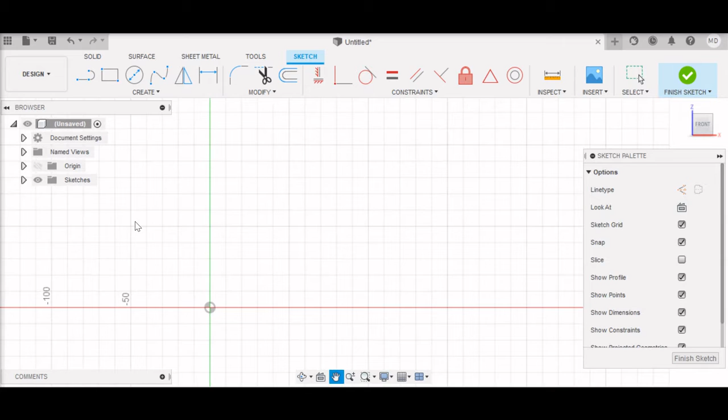Okay, we are going to design using Fusion 360 an electronics enclosure in a minimalistic style. We start by creating a sketch, then we go with a rectangle, we choose the extrude, and we set up 3 millimeters.

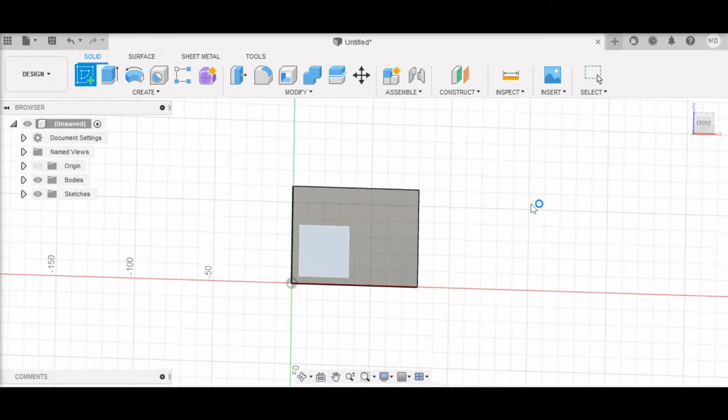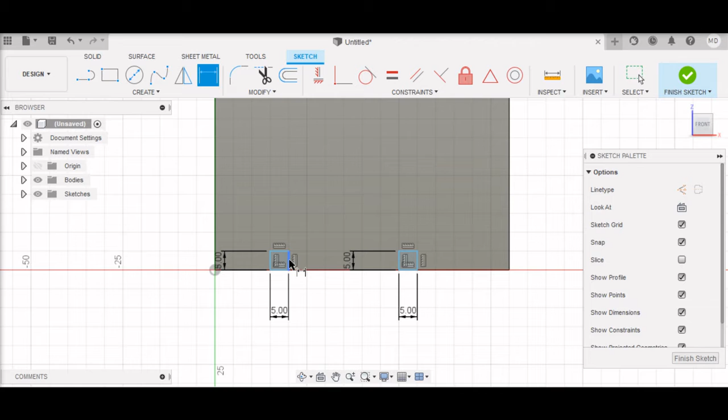At this point, we're going to create a different sketch, and we are going to put there the elements for an extrusion over this first layer. So we go with a 5x5 rectangle, another one. Then we check the measures with the electronics project and we put 31 millimeters in the middle.

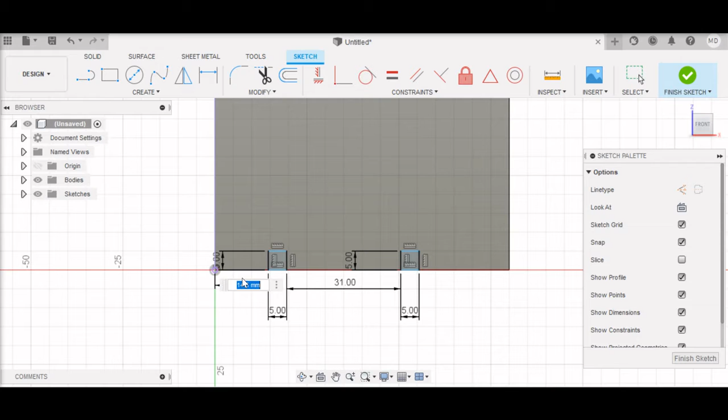Then we use the dimension tool to check the size over one side of the enclosure and the other one, and we make the adjustments so this is centrally aligned.

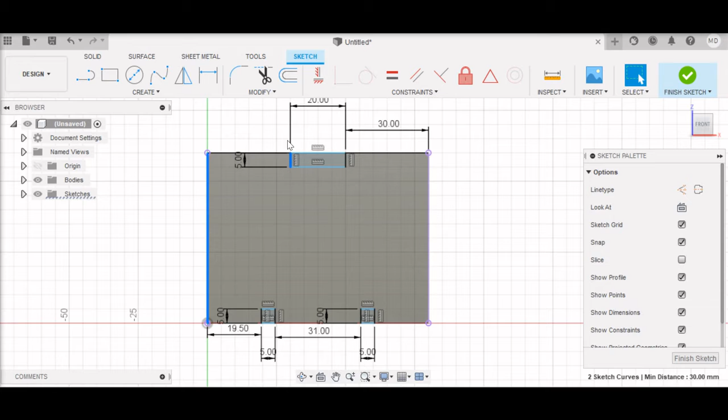The next step is to create another support at the back. This support is going to have 2 holes for screws, and we're going to put there a gesture device. Again, we check the distance to one side and the other one, and let's see, the other one is 30, so nothing to do here, everything is perfect.

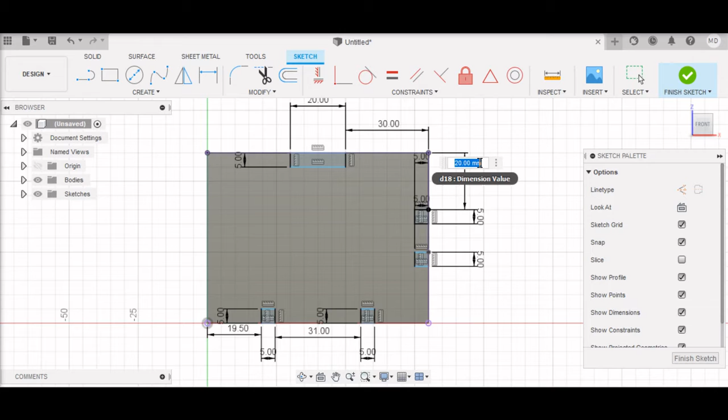And over the right side of this enclosure, we're going to add 2 little columns to hold a buzzer. Again, we do the same with the dimension tool to check the distance to the side. It's 20 millimeters to the other side. Let's check again, and we have 20 millimeters, so everything is perfect.

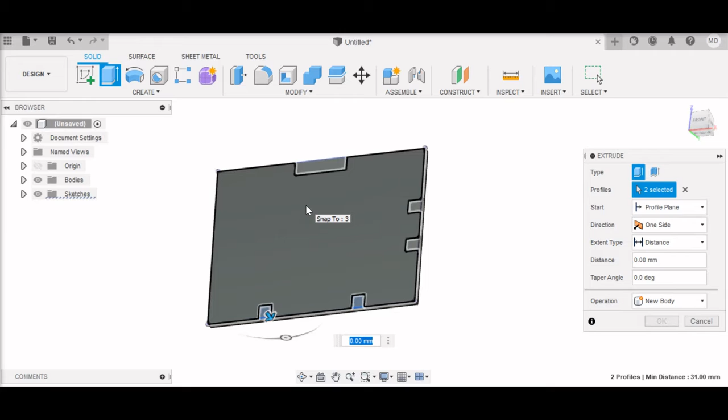Then we select extrude, we select all the shapes recently created. First one, these 2, because they're going to have a different size. To the other side, okay, so minus 25 millimeters. We select the sketch. These are for the buzzers. Will be a little less higher, 10 millimeters.

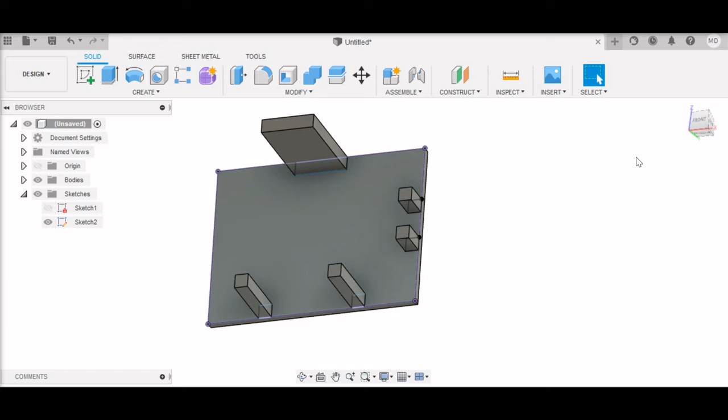And the last one goes up to 35 millimeters. So everything is looking good.

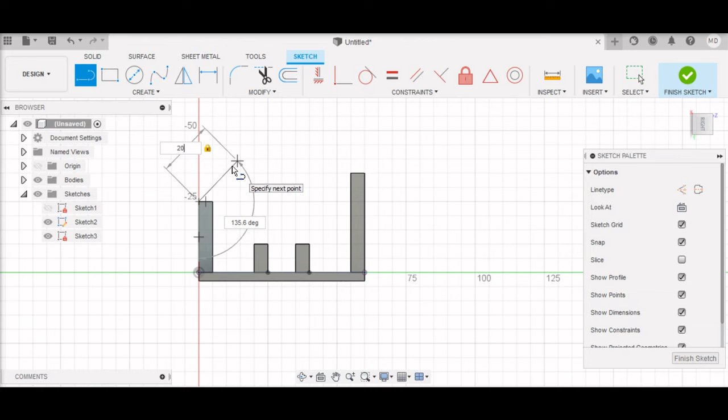Right now we are going to create a shape at 45 degrees, 135, it depends where you start measuring. 3D printers are able to go for 45 degrees without using support, so we're going to use this feature to avoid the supports. So again, 135 considering the other side, and we put 2 lines, we close the shape, and that's it for the sketch.

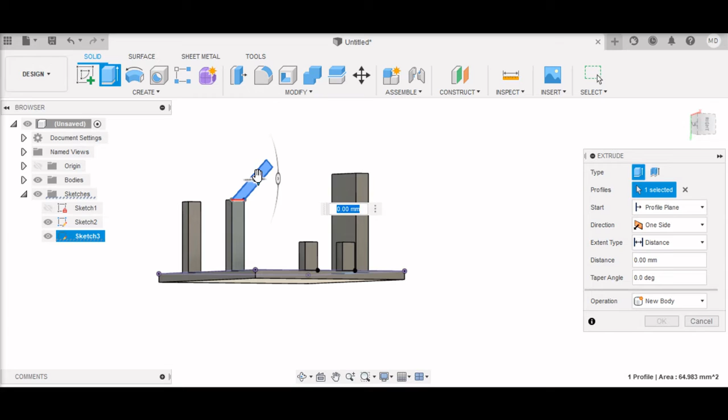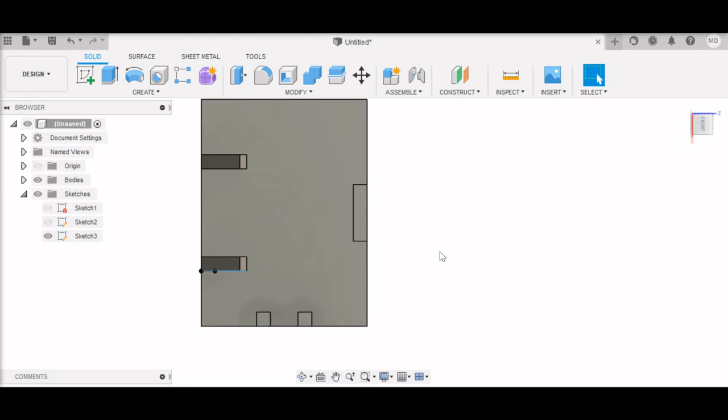We turn using the middle wheel of the mouse, and then we extrude to complete that shape. Now a little trick, we are going to use the same sketch, but we're going to start from another object to create the other column. Everything is looking good, just a little more details.

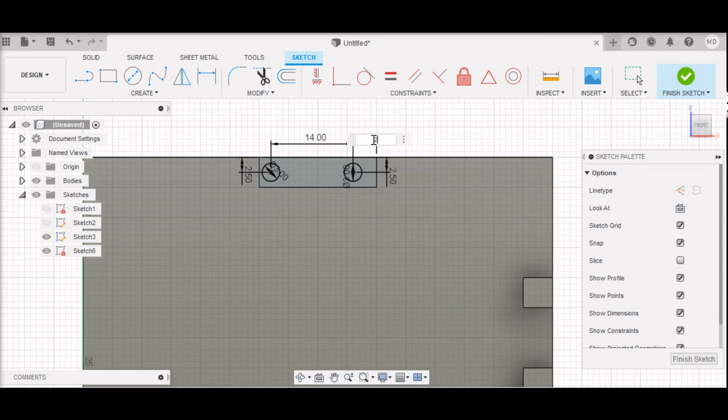We have to put here 2 holes, 3 millimeters holes for the screws. That's correct. We use the dimension tool. We put 2.5 right in the middle. Then we have to check the distance between these 2, which is 14. And we use the dimension tool to check the distance to the edges of that shape.

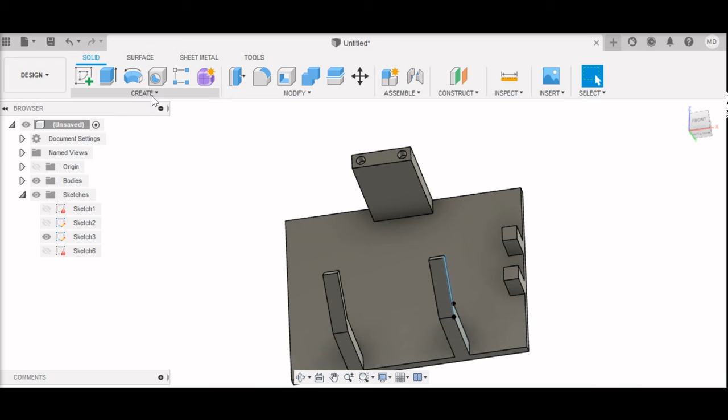So 3 millimeters, not 2, and everything is good. Now we extrude these two shapes, but we go to the sides using a cut. And we have the holes to put the screws there.

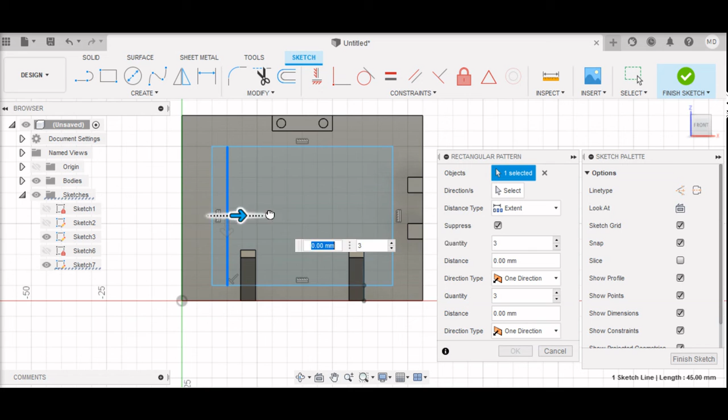Now a little detail, we don't have to use all that material for the base, so we're going to make a little shape there, and ventilation if you want so, and it will allow the use of the pattern feature, which is a cool feature to make decorations and stuff.

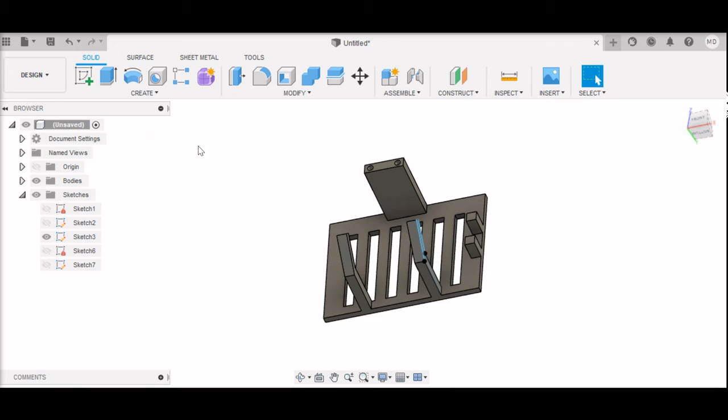So we select 10 repetitions and we finish the sketch. We choose one and the other one, every other one, and we make an extrusion, a cut extrusion. Okay, so everything is ready, less than 5 minutes to create a complete enclosure without using any types of support.